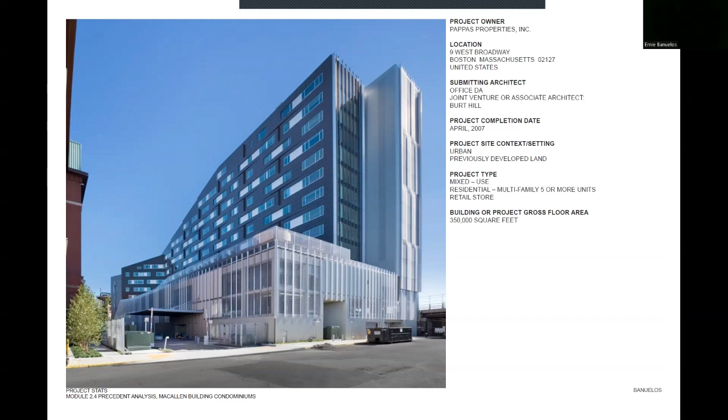This project was completed in April of 2007, and it is considered an urban project previously developed land. The project type is a mixed-use residential multifamily, five or more units, and retail store. This building has a gross floor area of 350,000 square feet. And some interesting things about this project, it's 140 units in total.

It can save up to 600,000 gallons of water per year. It consumes 30% less electricity than the conventional building. And its design is heavily focused on green design, incorporating a way in which that green lifestyle is marketed to the community of Boston. So some of the features include technology that saves water, reduces electricity use, and also

this project was LEED Gold certified because of its sloped green roof that controls stormwater drainage, filters pollutants and carbon dioxide out of the air, reduces heating and cooling loads, and reduces the project's contribution to the urban heat island effect, as well as providing an ecosystem for wildlife.

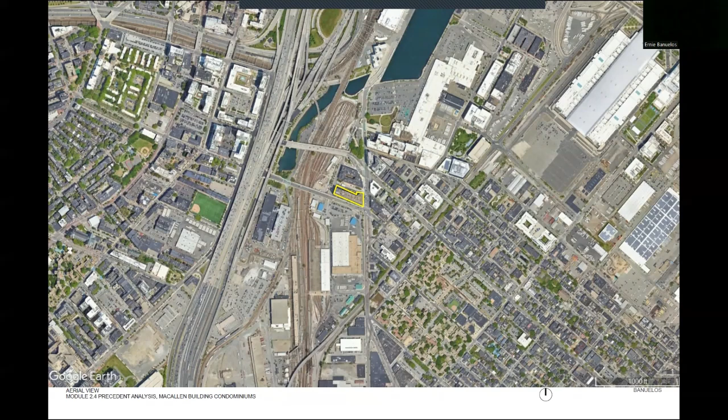And then here I drew these floor plans for three types of units. There's the three bedroom, the two bedroom, and the one bedroom. So something interesting about the three bedroom is that it has two doors. This door kind of leads to that kitchen area. So I'm guessing this is more for like staff. It has plenty of room for dining and entertaining. And then it has these three rooms. It has this big main primary bedroom with this private restroom. I thought that was pretty cool.

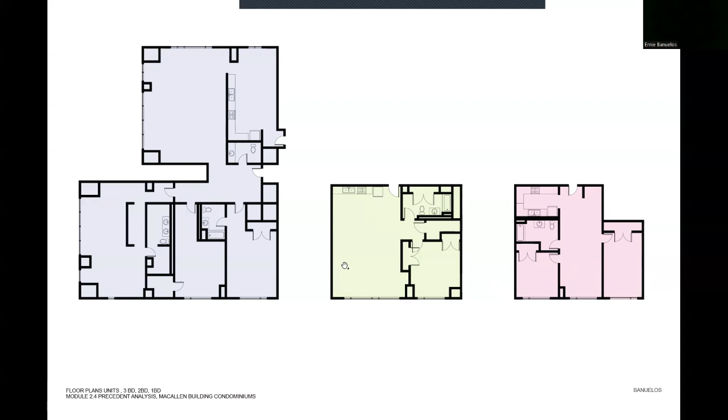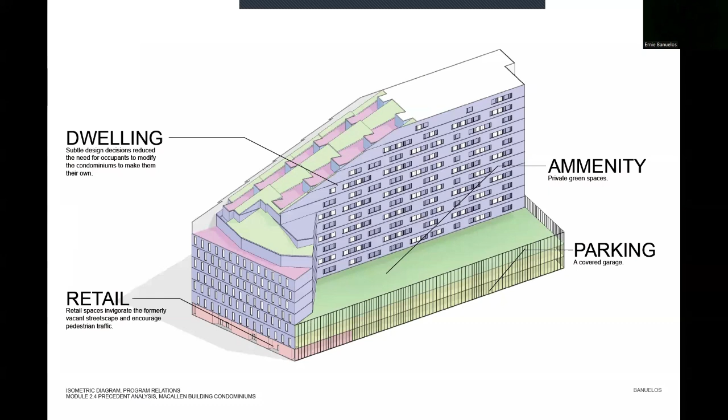Here I have an isometric diagram kind of showing the program relations. So we see that the dwelling units are part of this, I guess, sort of a perimeter block typology. And then we see the amenity spaces making up this big chunk of green space, private green spaces. We also have some retail at street level, which kind of encourages that street level pedestrian traffic. And then we have covered parking underneath the building.

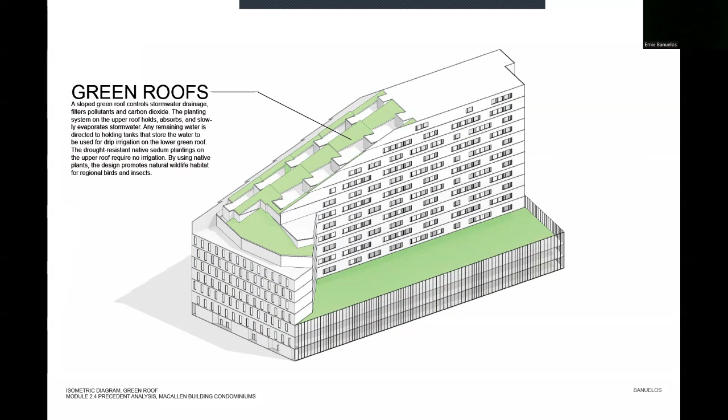So this diagram kind of shows us a little bit more about the green roofs. So this project has a sloped green roof that controls stormwater drainage, filters pollutants and carbon dioxide. And the planting system on the upper roof holds, absorbs, and slowly evaporates stormwater. Any remaining water is directed to holding tanks that store water to be used for drip irrigation on the lower green roof. They also use drought-resistant native plants that require no irrigation. And by using these plants, this design initiative kind of promotes that natural wildlife habitat for regional birds and insects.

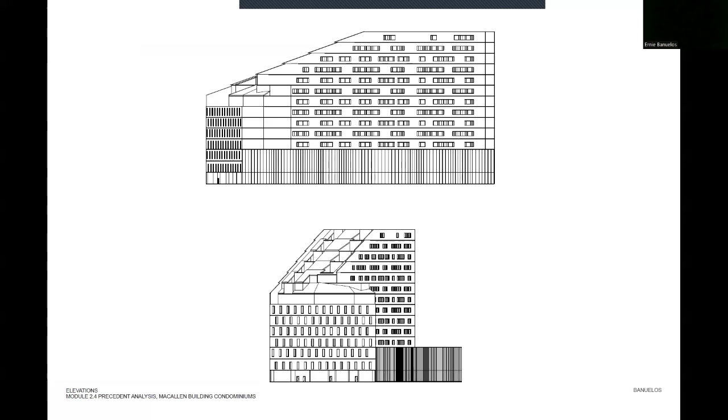And then some of the key ideas and lessons from this project that I found very interesting was the use of rainwater for irrigation of the site that's collected and stored from the green roof. I thought that was pretty cool. Also, the eastern end slopes down to an intimate scale. And this kind of mirrors the more traditional buildings, so brickwork and storefronts that are located on that particular elevation. But then on the north and the south facades, we see these aluminum panels that are shown in this picture, to kind of reflect that industrial neighborhood.

So I thought it was very interesting how in one building, depending on where that facade was facing, they kind of tailor it to the buildings that were around that area, given that this particular project is at an intersection where on one side you have those more traditional brick retail spaces, but then on the other sides you have those more industrial commercial buildings. So I think they did a very good job at tying both typologies into one building and making sure that there was consistency on its facades.

So they use operable windows in order to bring in that natural ventilation and cooling when the seasons are appropriate. Also, the insulated walls and windows add to the acoustic qualities of the indoor spaces. Frames and double glazing serve to protect occupants from noise of the adjacent bus station, train terminal, and overhead planes, as there's also an airport nearby.

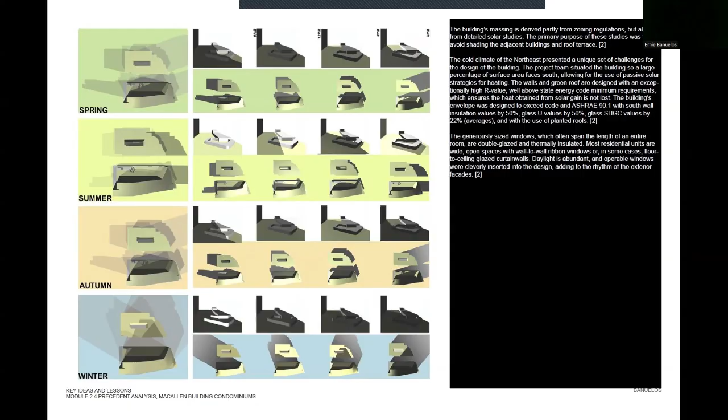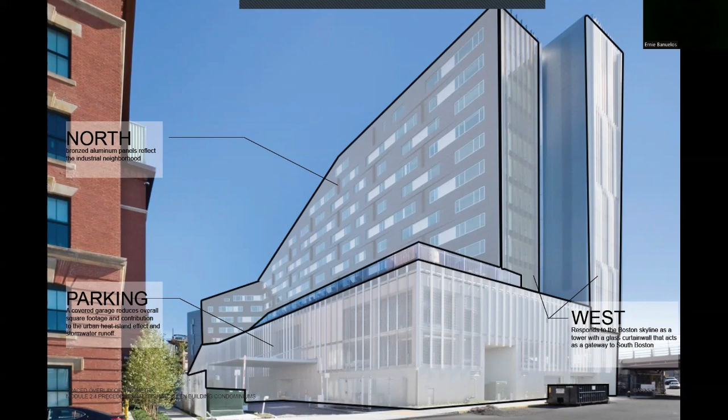This is just an traced overlay of a picture. So this kind of shows us the different elevations. So we see the north, how they use that bronze aluminum panels to reflect the industrial neighborhood on that particular side. But then on the west, they used glass curtain walls in order to respond to the Boston skyline, as this kind of faces that side of town.

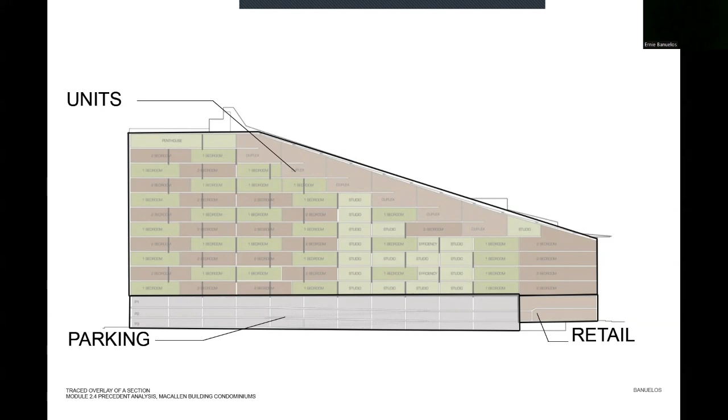And then this is a traced overlay of a section. So this kind of shows us the retail, the parking, and the units. And it just kind of shows us how the different types of units are laid out on the building. Something very interesting about this project is that the floor plans are very different. Going from one level to another, things change quite a bit, and you don't see much of a consistent floor plan. But looking at it from this section view kind of allows you to see the pattern that they have going on. And it looks like they kind of alternate floor plans every 2 floors, every 3 floors. But yeah, I think that was very interesting.